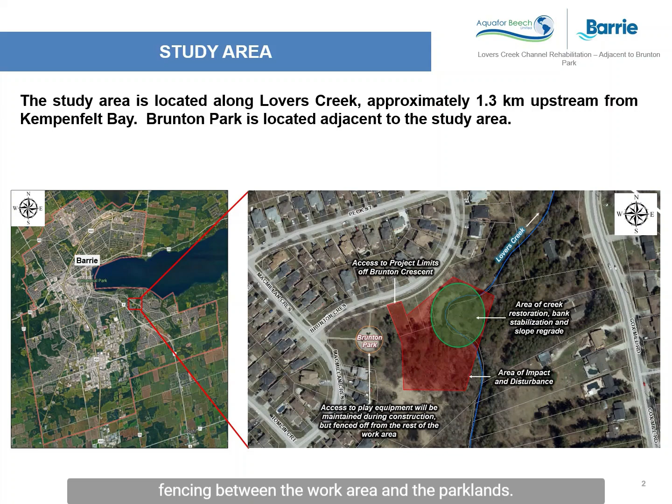Access to the creek for the purposes of erosion protection will be gained off of Brunton Crescent, as shown within the red hatched area on the aerial image, with the specific work area of slope stabilization and erosion control highlighted with the green circle. The Brunton Park playground will remain open during construction, with a clear and safe division by temporary fencing between the work area and the parklands.

This active erosion along Lovers Creek has been occurring for some time and is a natural process which will continue to erode and oversteepen the slope without mitigation. This area was fenced off in 2006 to address local residents' safety concerns. However, with the erosion continuing, only mitigation measures within the creek below will stop eventual loss of all parkland.

The purpose of this digital PIC is to present the detailed design plans, which include aspects such as tree removals, as well as compensation replanting, construction details, such as where specifically the erosion control works will occur, as well as aspects such as construction access and associated details such as flow management and erosion control.

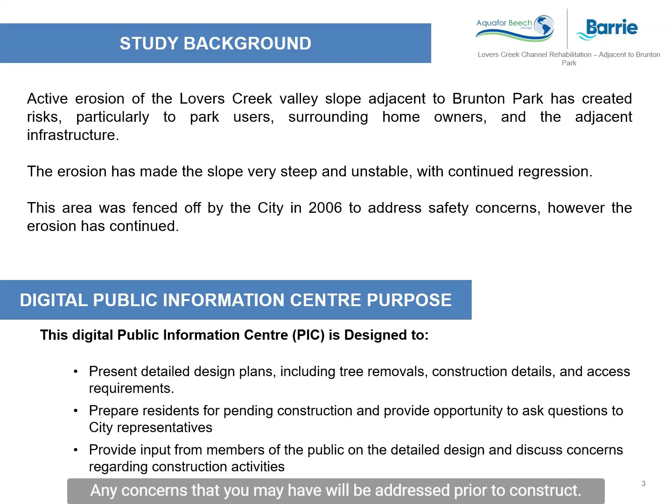The PIC will prepare residents for the pending construction and provide an opportunity to ask questions to city representatives. Any concerns that you may have will be addressed prior to construction.

The specific details or highlights of construction will include an armor stone retaining wall, which will stabilize that oversteepened slope. However, between the retaining wall and the creek, there will be a vegetated buttress composed of large rock boulders, soil, and native plantings, which will offer shade to the creek.

In order to implement the armor stone wall and the vegetated buttress, a minor realignment of the watercourse will be required, of which we have used natural channel design principles to modify both the bed and the banks. Following construction, an extensive native tree and shrub planting plan will occur to provide compensation for all impacted areas.

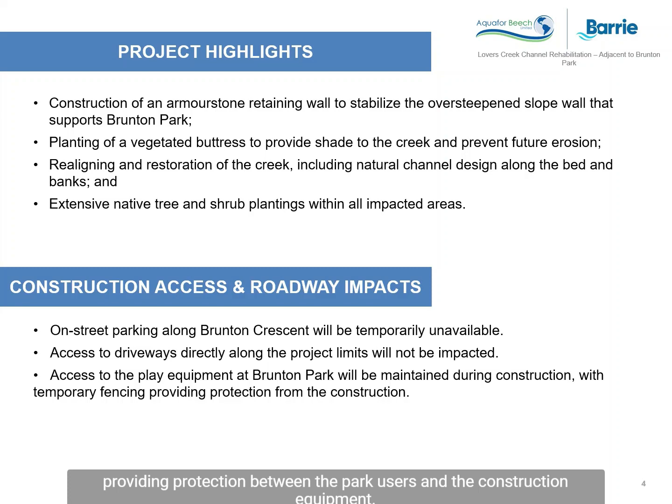Specific to the roadway impacts and construction access, on-street parking along Brunton Crescent will be temporarily unavailable for the duration of construction. However, access to the driveways directly along the project limits will not be impacted. Also, as previously noted, the playground will remain open throughout the duration of construction, with temporary fencing providing protection between the park users and the construction equipment.

Some representative photos of the existing conditions are presented, with photo A, a historic crib wall that provided a small lookout which is no longer accessible and will be removed. Photo B, showing a recent major failure of the slope where trees from up top have fallen down into the creek below. This is a result of undermining the root masses and the continued regression of the slope.

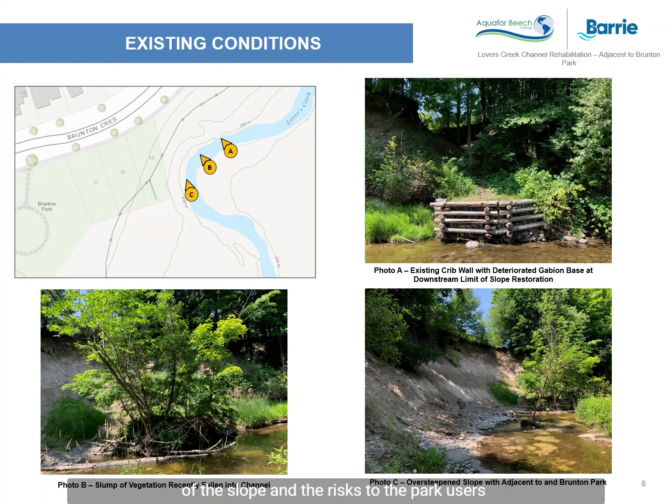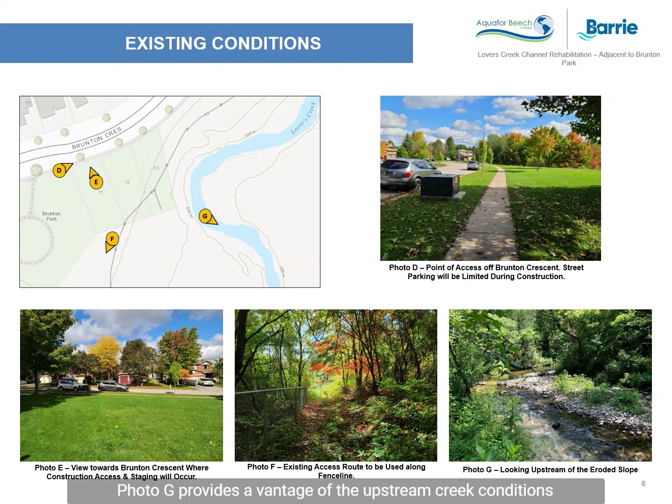Photo C in the bottom right shows the oversteepened nature of the slope and the risks to the park users that are located just beyond the top of the trees. Photo D illustrates the point of access off of Brunton Crescent, where construction vehicles will enter into the parkland and then continue through as shown on photo E and photo F in order to gain entry into the valley below. Photo G provides a vantage of the upstream creek conditions where the proposed works will be tying into.

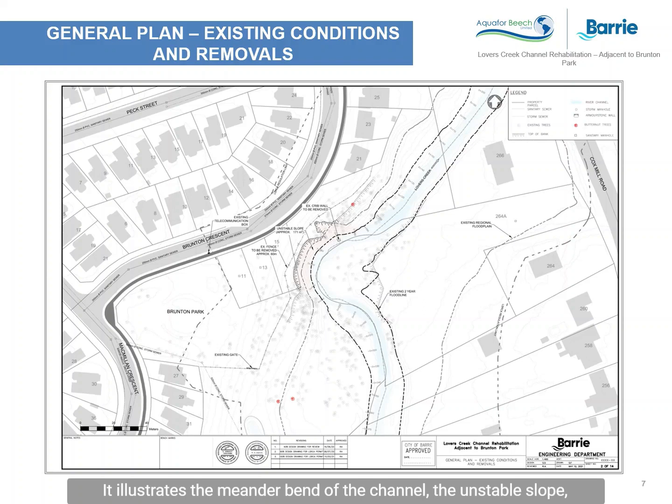This is the engineering drawing that represents the existing conditions of the watercourse and the slope in close proximity to the parklands above. It illustrates the meander bend of the channel, the unstable slope, and then the proximity of that existing fence line that will be removed and then replaced.

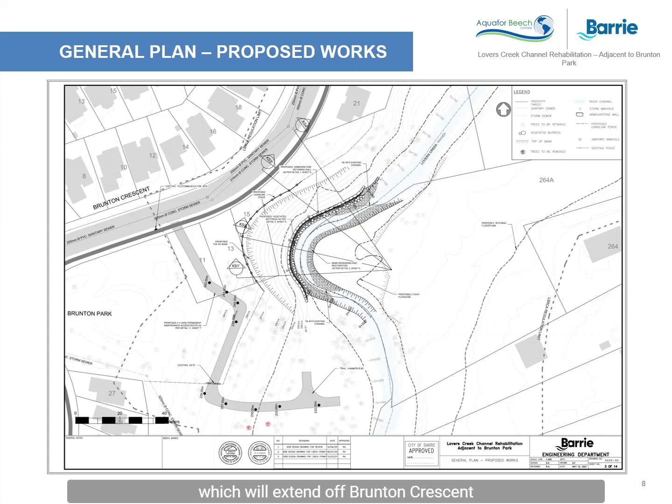This drawing, in contrast, shows the proposed conditions that will be created following construction. It includes a permanent access road, which will extend off of Brunton Crescent and offer access for any maintenance works down into the valley.

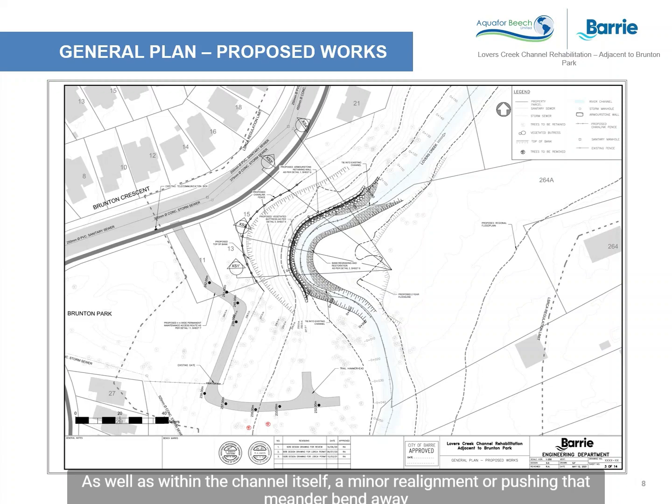It includes an armor stone retaining wall with slope regrading to a stable inclination and a new fence line between the top of slope and the park, as well as, within the channel itself, a minor realignment or pushing that meander bend away from the slope with a vegetated buttress buffer between the creek flows and the armor stone retaining wall.

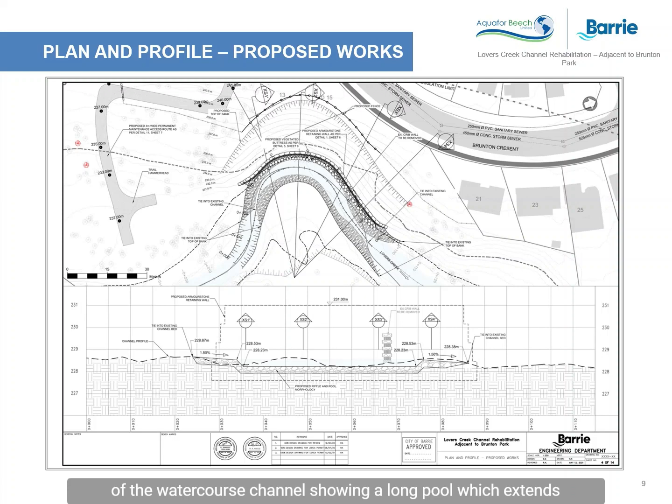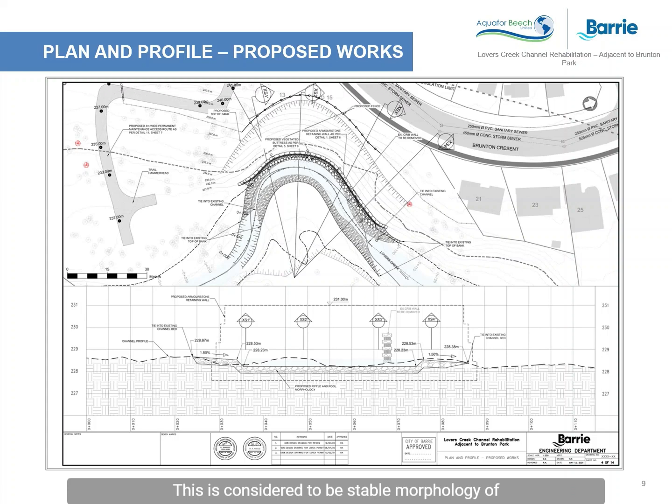This drawing illustrates the plan form across the top, similar to what we had just looked at, as well as the profile of the watercourse channel, showing a long pool which extends around the meander bend with transition riffles upstream and downstream. This is considered to be stable morphology of the watercourse and will provide enhanced aquatic habitat for fish species which reside within the Lovers Creek corridor.

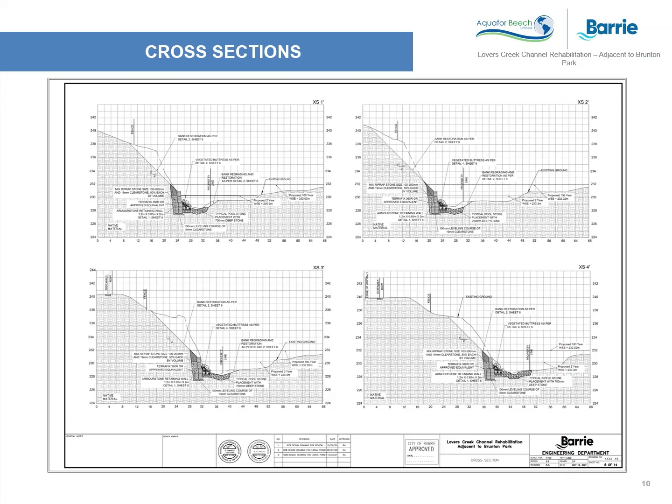Detailed cross sections are also included, illustrating the height of the armor stone retaining wall, as well as the extent of that slope regrading. The vegetated buttress is illustrated as a buffer between the retaining wall and the channel below.

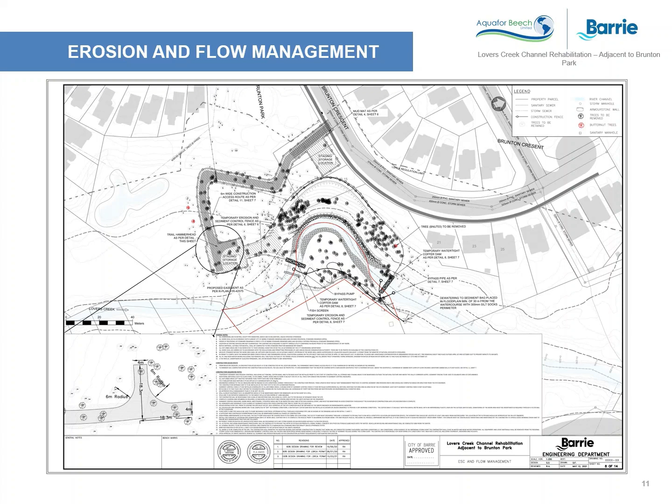This drawing illustrates the erosion control fencing that will be installed as a temporary measure along the access road, and also illustrates the flow management program, which will include bypass pumping of the creek channel, allowing construction equipment and materials to work within the dry. Trees will need to be removed to facilitate construction, which have been identified by our team's certified arborist for removal.

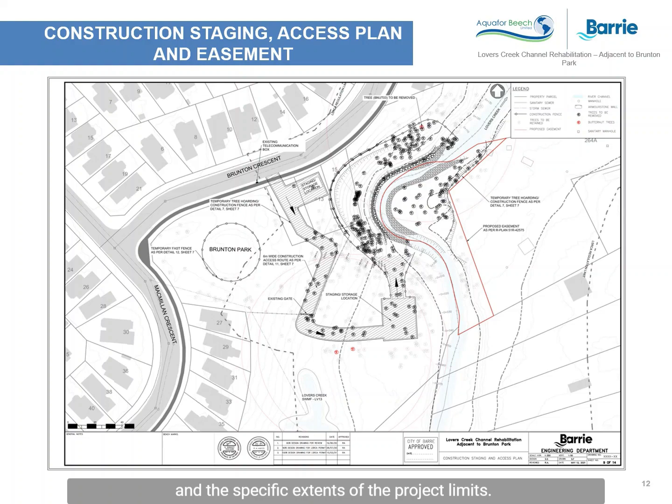This drawing further illustrates the extents of the access as well as temporary staging and storage within the parklands above, and the specific extents of the project limits, trees that will be impacted and removed, as well as fencing adjacent to the Brunton Park playground.

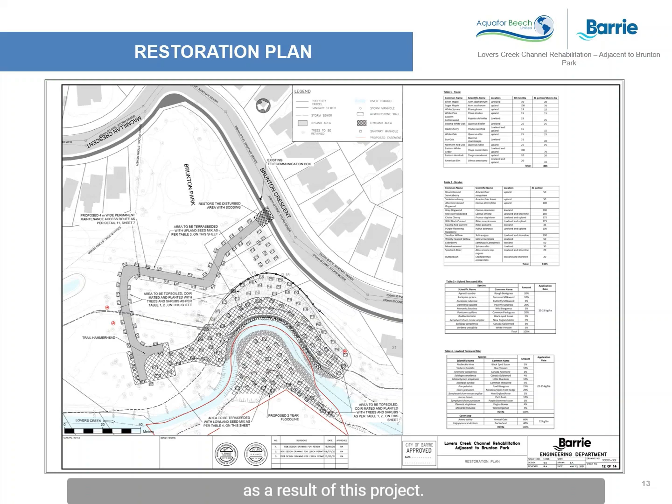The restoration plan that will follow construction includes significant tree plantings as well as shrub plantings. Over 800 trees and 1,300 shrubs will be planted as compensation to ensure that an overall benefit to the riparian system occurs as a result of this project. Ground cover will also be restored with a terraseed mixture of grasses, flowers, and ferns.

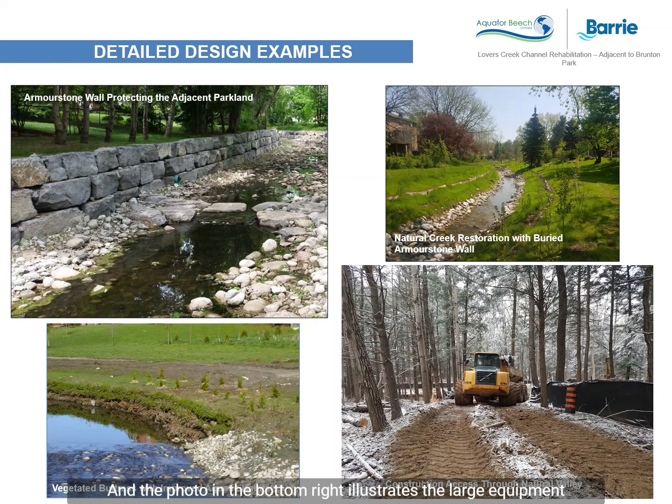The bottom left is a good example of the denseness of some of the native vegetation that will be included within the buttress, providing an enhancement to the overall aquatic habitat in specific contrast to the existing slope. And the photo in the bottom right illustrates the large equipment that will be used and how access within a natural system can be obtained for such large equipment with minimal impacts on the adjacent trees.

Construction activities and best management practices include the use of experienced contractors. All contractors who will be given the opportunity to bid on this project will need to meet specific experience requirements. Construction supervision will be undertaken by a qualified professional with experience in similar projects. A safety-first mentality will be undertaken, including use of personal protective equipment for all workers, containment of the site, as well as respecting all COVID protocols consistent with City of Barrie and provincial requirements.

Erosion sediment control and flow management throughout construction will occur, and a fish relocation program prior to any work that occurs will be undertaken. The tree preservation plan includes protection of all adjacent trees which will not be impacted, as well as replacement and compensation with new plantings following construction. A post-construction monitoring program will occur alongside a warranty for the project.

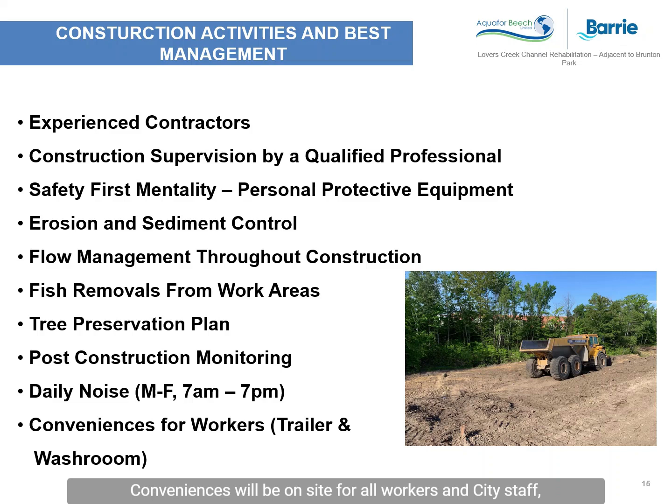And during construction itself, the residents can expect daily noise between Monday to Friday from 7 a.m. to 7 p.m. Conveniences will be on site for all workers and city staff, including a trailer and washroom. The implementation of the proposed works is scheduled for the summer of 2022.

As a result of the fisheries window, all in-water and near-water works are to take place between July 15th and October 1st. However, tree removals prior to this time and before April 1st will occur to mitigate any impacts or risks with regards to nesting of birds.